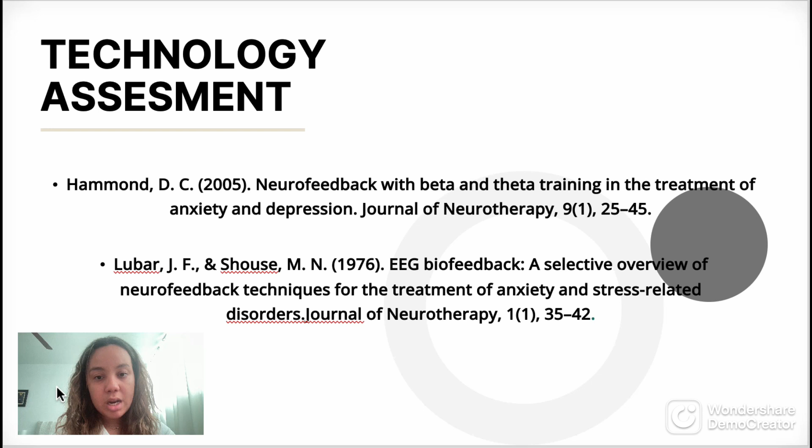Here we have the technology assessment. This is some information that I found on the internet about neurofeedback with beta and theta training for anxiety and depression, and some EEG biofeedback to implement in the headphones that we will be using.

They're going to be made from soft, hypoallergenic, breathable materials that minimize discomfort during prolonged use, since we estimate that the average client or patient will be using these headphones maybe all day long, so we do want to minimize the discomfort for the prolonged use of the device.

And the interior of the ear cups will include the sensors for the physiological measurements to detect that stress. It will have sweat, GSR, the EEG brain waves, oxygen levels, heart rate, everything that the physiological measurements will measure when you have that stress.

I wanted to include some materials that we could use for this subsystem. So we have memory foam, which a lot of headphone companies use to provide comfort and enhance the fit to the ear shape of each patient.

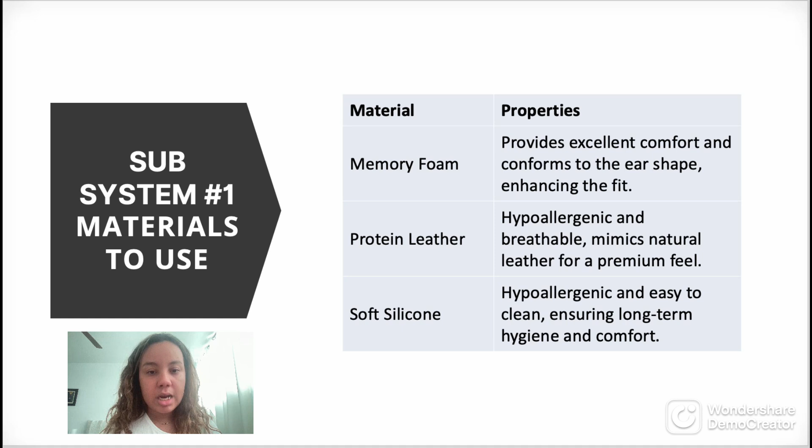The other material that we will want to use is protein leather because it is hypoallergenic, and we do want every material to be hypoallergenic because there are some patients that are sensitive to some materials and fabrics, so their skin won't get irritated, and soft silicone because it's yet again hypoallergenic and easy to clean.

And instead of having the sensors on the ear cups like the first subsystem, this subsystem will have the sensors on the headband, making it more secure and closer to the skin so that we can have more reliable data on the stress levels and how to manage them. It will include all the sensors: the GSR, the sweat, heart palpitations, the oxygen levels. It will have everything just on the headband, and the headphones will be used to manage that stress.

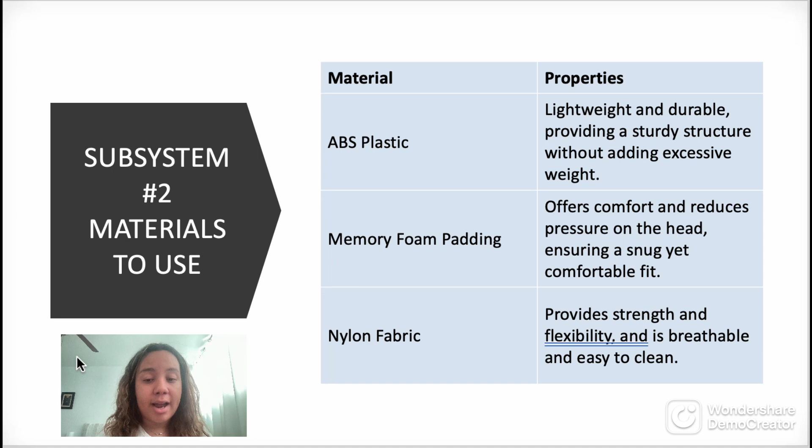I made another table for the materials that we will want to use. The first one being ABS plastic. ABS plastic is used the majority of the time because companies like to use ABS material because it's lightweight and durable to make the headphones. So a lot of the headphones that we see out in the open are probably made from ABS plastic. And memory foam padding, again, because it offers comfort and is hypoallergenic, and nylon fabric that provides strength and flexibility.

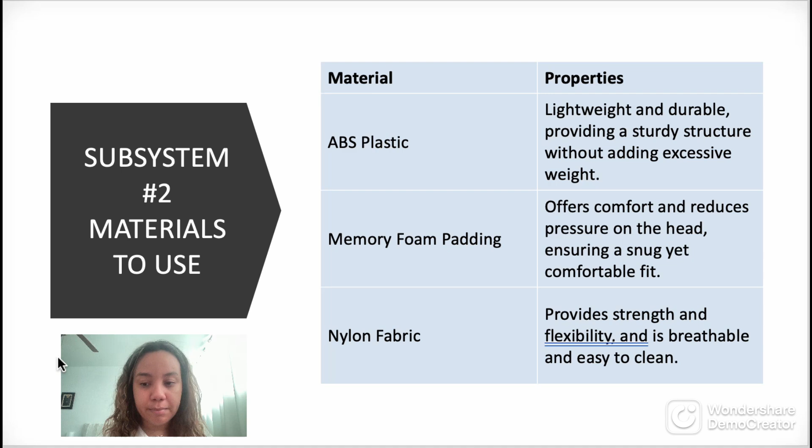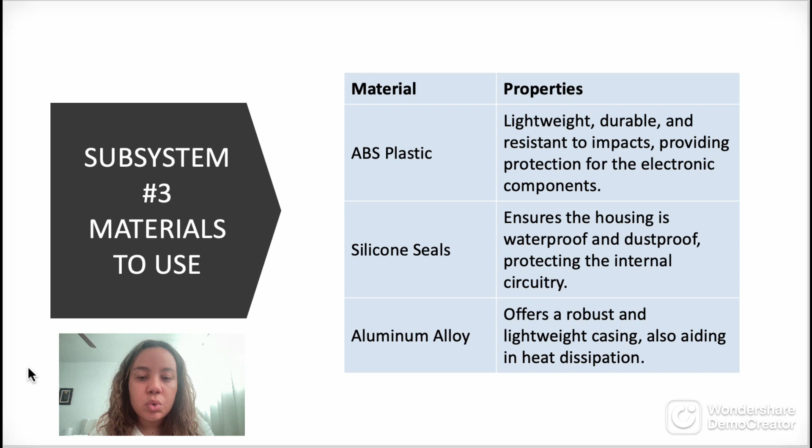So we want the heat transfer to not be as much as when we have the memory foam padding, because it will get burned since it is more electronic driven. And aluminum alloy because it offers a robust lightweight casing, also aiding that heat dissipation that we want with the silicone seals.

So the headband frame will be the main structure, providing support and durability, and then we do the adjustment mechanism that allows the user to customize the fit of the headband. The padding layer ensures comfort against the head, and the covering material, the nylon and protein leather, offers a finish that can enhance aesthetic and comfort. It's more of an aesthetic type.

And then we have the hinge mechanism that facilitates the movement and the flexibility of the headband. And the mounting points will add the location where the sensors will be attached, ensuring stability and functionality for the headphones. Now for that, we did some calculations.

I did want to do some heat transfer because it is really important, since we don't want any heat coming to the patient and happening something that we don't want, or the headphones melting. So we did some heat transfer calculations. We did the thermal conductivity, the surface area, the temperature on one side and the other side, and the thickness of the material for the foam, for the area of the ear pads, the body temperature, the ambient temperature, and the thickening of the padding if we're going to use memory foam.

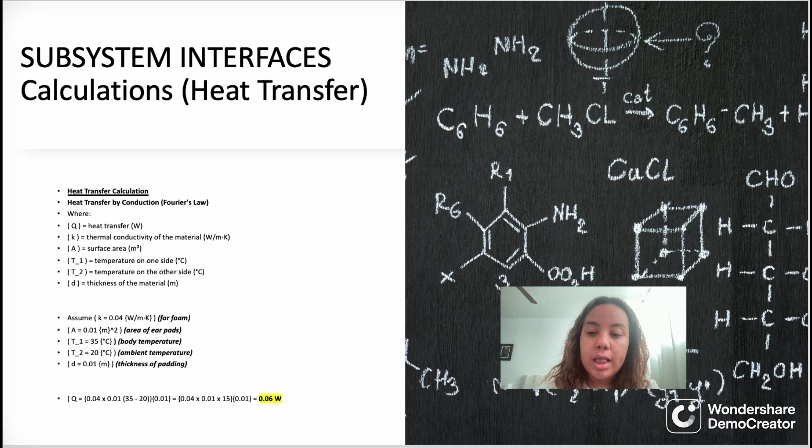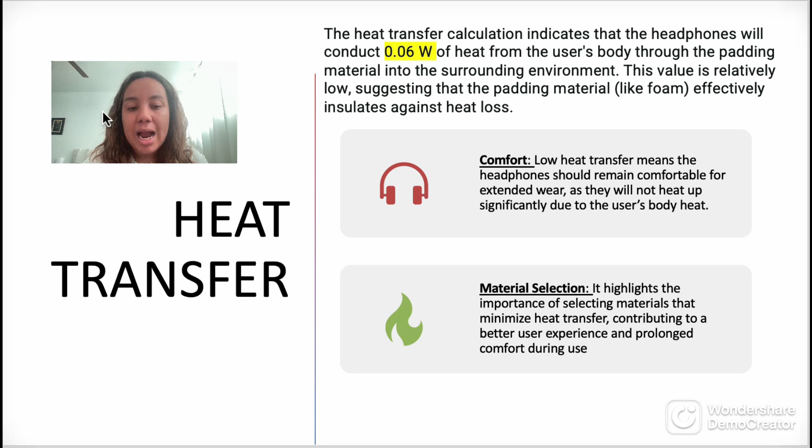So this is what it gave us. It gave us 0.06 of heat from the user's body through the padding material to the surrounding environment. So low heat transfer means the headphones should remain comfortable for extended time of wear. They will not heat up due to the person's body heat. And it highlights the importance of selecting materials that minimize heat transfer. So we will be good on that side.

And for the market competitiveness of this, it's pretty good because long battery life can be a significant selling point in the competitive headphone market. A lot of people hate the idea of having headphones and having to charge them frequently, so having some headphones that will manage your stress and give you accurate data of how your stress levels are, and then having 15 hours of battery life would be amazing for the market competitiveness and the patient.

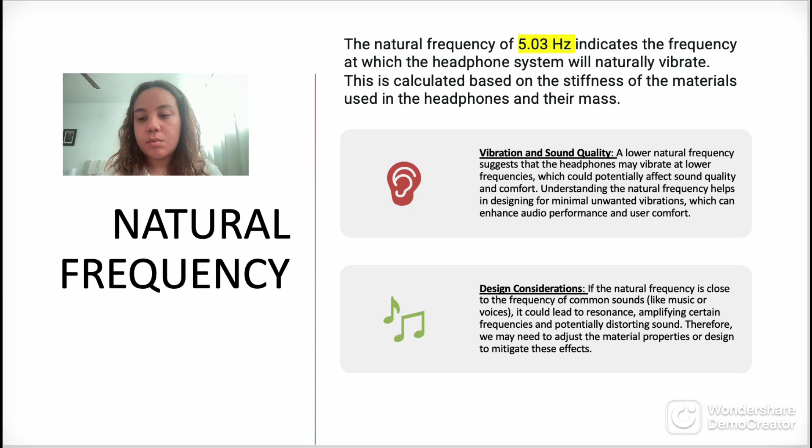We also did some free body calculations. This is really important for the durability of the headphones. We calculated the weight, the normal force, the friction force, and the tension of the headphones, which gave us an analysis of the free body diagram, and it reveals the interaction of the forces acting on them when worn. So we want to highlight the importance of the weight, normal force, friction and tension to ensure that the headphones are stable and durable and remain comfortable.

The second alternative was ABS material, the one that everybody uses to make headphones, and we will do the same. We will inject the mold and make the functional headband durable and last more, since headphones usually do have ABS material on them. The third alternative is all sewed memory foam, no injecting, no chemicals, just an all memory foam padded headphone that adapts to the head and aims to provide a premium listening experience by comfort, sound quality, and durability.

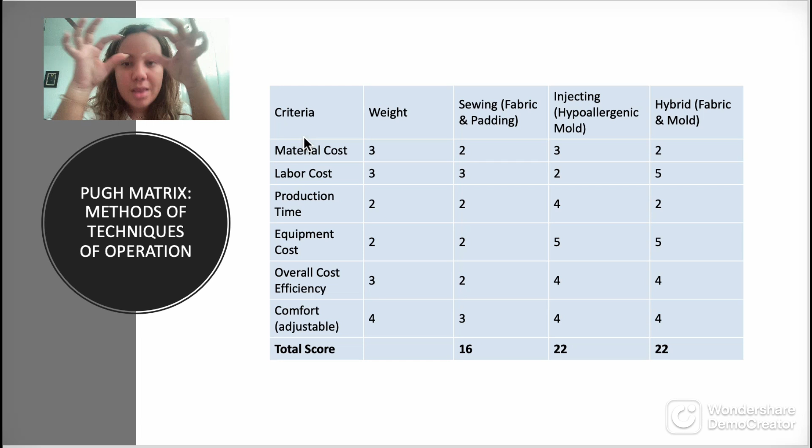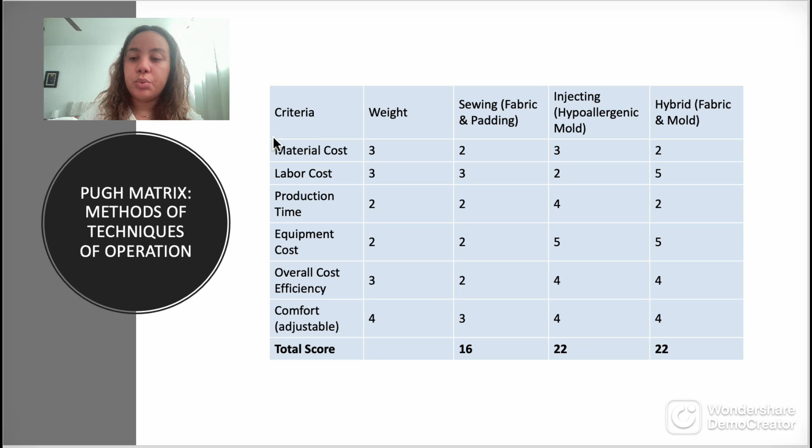So we don't want the patient to become uncomfortable and heat up more, since it's just a lot of plastic for the headphones, and then we will sew memory foam onto the padding, so we can add the sensors here, and you can listen to what the person has to say to get physiological measurements and stress.

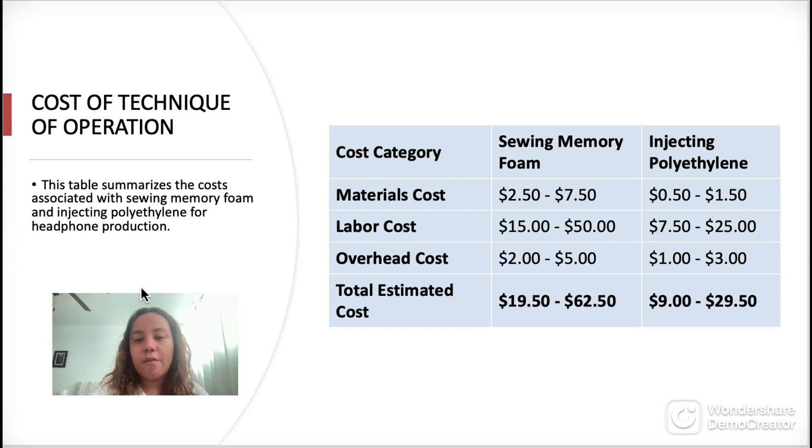So here we have the cost of operation. This is a summarized table of the costs associated with the sewing of the memory foam and the injection of polyethylene for the headphone production. So we have material cost, labor cost, overhead cost, and the total estimated cost for the sewing and injecting of the polyethylene mold. Here we have some risks and mitigations of the polyethylene injection on the headbands.

Some of the risks are material brittle at low temperatures, because polyethylene can become brittle in cold conditions, but for that we will use a high density polyethylene variant or blend with other plastics to improve performance, but we think just using a high density polyethylene would be the best option. Another risk is deformation at high temps. Polyethylene may deform or melt at high temperatures, but since we did the calculations and it gave us 0.6 watts, we think it's not going to be a problem since it's not going to heat up a lot. But if it does happen, we will ensure the headphones operate within the temperature range suitable for polyethylene.

Another risk is UV degradation, because prolonged exposure to UV light can degrade polyethylene. So for that, we will add UV stabilizers to the polyethylene or use a protective coating on the outer of the headphones. Another risk is chemical resistance, because polyethylene may react with certain chemicals. We will avoid exposure to harsh chemicals or use a polyethylene variant with enhanced chemical resistance. Sound quality is another risk, because polyethylene might affect the acoustics of the headphones, but we will design and test prototypes extensively to ensure that the material does not adversely affect sound quality.

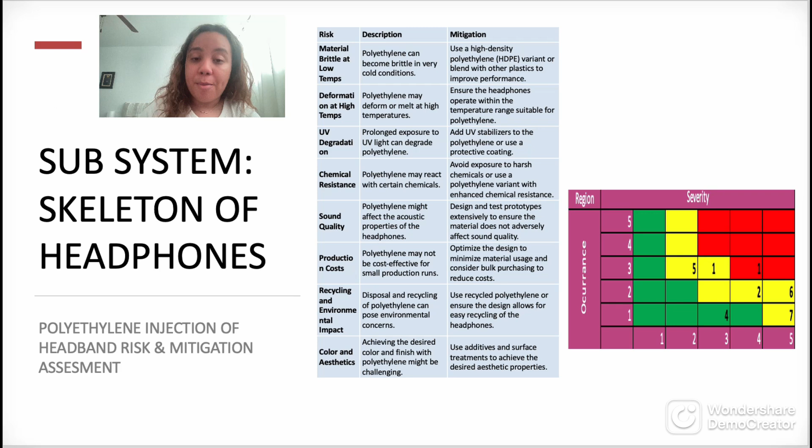Production cost is another risk, of course, since polyethylene may not be cost effective for small production runs. We will want to design and test prototypes to ensure the material does not get more expensive. So for that, we may buy in bulk sizes. It's way cheaper. Recycling and environmental impact: polyethylene can pose environmental concerns, but we will use recycled polyethylene or ensure the design allows for easy recycling of the headphones. And the last risk is color and aesthetic. Achieving the desired color and finish with polyethylene might be challenging, but we will use additives and surface treatments to achieve desired aesthetic properties. We have another subsystem risk and mitigation assessment for the memory foam.